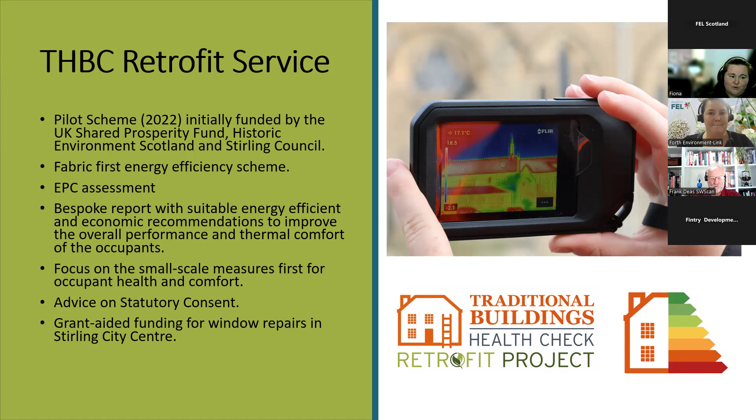The reason we did this was because we wanted to help traditional properties become ready for net zero, and also take a more realistic approach to net zero, because some of the things like external wall insulation aren't always suitable. So we would also provide advice on that and on statutory consents.

So back onto the topic, climate change is a serious global issue that is negatively affecting all of our properties. Higher temperatures and more intense solar radiation are leading to scorched masonry and uncomfortable temperatures for occupants. It's becoming more popular for properties in Scotland to install air conditioning in new builds, or retrofit cooling methods, to improve thermal comfort.

Our buildings are also exposed to more frequent and intense rainfall, resulting in saturated masonry and leaks within the property. In Scotland, we're well known for having smaller depths of gutters, whereas down south they have larger depths, and that's classed as a retrofit in traditional buildings if you were to do that. There's also wetter winters and increased wind speeds, resulting in damaged building fabric.

This damage can also create the perfect environment for vegetation to grow in unwanted places, or in hard-to-reach areas like gutters. All of these issues create serious problems for occupants' health and well-being due to the accelerated decay of their property. Properties exposed to water ingress and unplanned air infiltration are harder to heat, leading to higher energy use and energy bills. This is why it's important to realise that the first step to adapting your property to climate change is to keep the property dry.

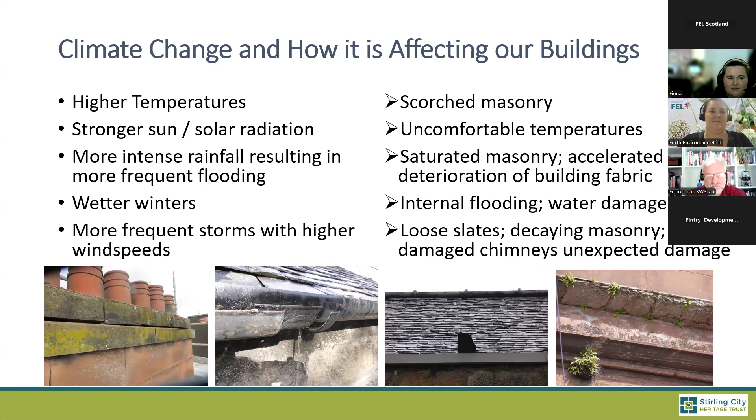First steps, fabric first approach. This is to treat the building to make sure that it is wind and water tight. Many or most owners do not realise that there is an issue until it physically presents itself internally, for example, if there's a leak in the ceiling.

It's important to encourage property owners to maintain and monitor their buildings. For example, if you have a slate roof or a tiled roof in general, some contractors offer an MOT, where they inspect the condition of the roof coverings and provide small repairs and other services such as bird proofing and ventilation. Other important areas are to always check any chimneys attached to the property or neighbouring chimneys to ensure that they are structurally sound and prevent unnecessary damage.

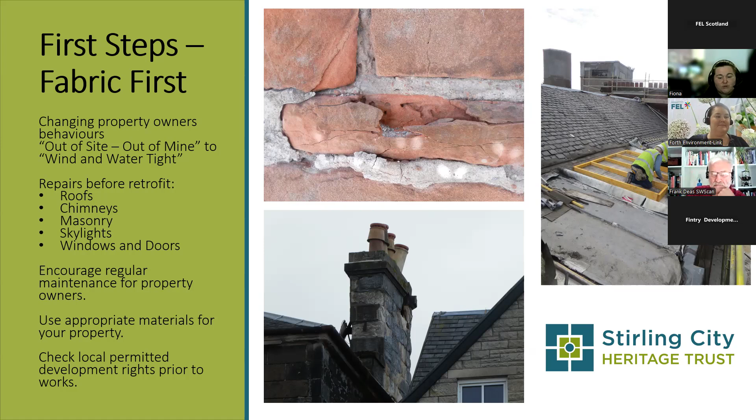If you're repairing a traditional property, for example, a sandstone property with a slate roof, you must ensure that appropriate materials are used. Avoid using cement products or expanding foams, as these are difficult to reverse and can be damaging to the historic fabric. It is also important to ensure that all areas are looked after and remain wind and water tight. So ensure you clean your gutters.

When maintaining and repairing your property, there may be an opportunity to also adapt the building fabric to withstand the changing climate. Here are a few examples.

Stirling City Centre had severe flash flooding last year, which led to excessive water running down from the castle, down the steep hills and directly into the shops, causing closures.

There's also an opportunity to install clay or tiled shop fronts to protect any timber or metal window frames.

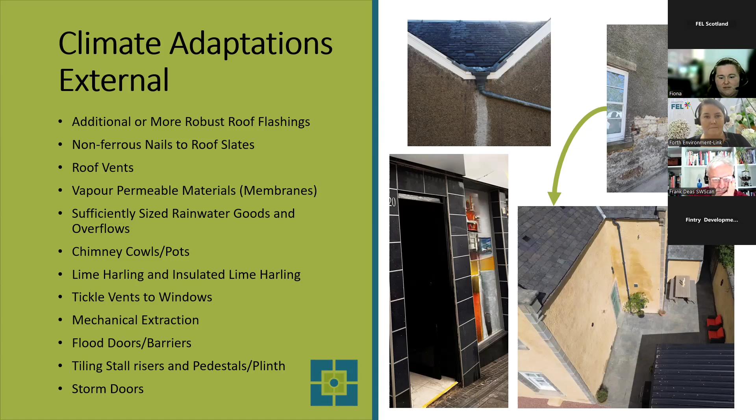This can also help waterproof and windproof the property. And if you have exposed brick walls or anything, as you can have in modern buildings, you can apply a rough cast, and this can prevent moisture deterioration to the building fabric.

I always encourage that you regularly, annually or biannually, get a chimney sweep to ensure that the condition of the flue is sufficient. Another alternative is to replace open fireplaces with an appropriate stove, such as biomass. This can reduce drafts and also provide a sustainable secondary heat source to a room.

Other fabrics can also apply to insulation. Now, you have your main area, which is your loft space, and most properties are usually fitted with some form of insulation, but sometimes it's maybe not as thick as the current recommendation, which is a minimum thickness of 270 millimetres.

When applying additional insulation, it's recommended to always apply on top of the existing insulation, as insulation can be a skin irritant.

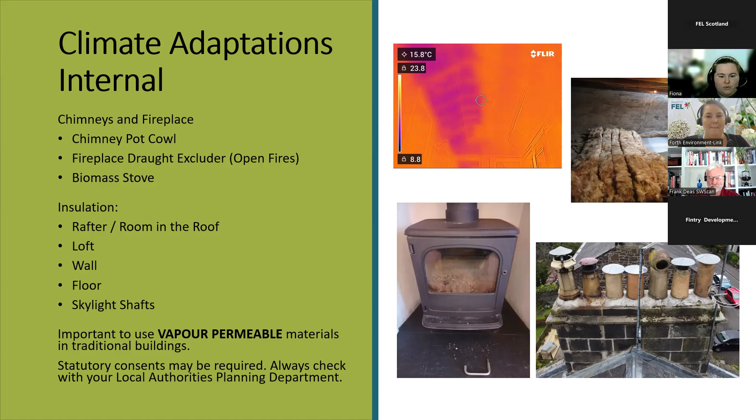Other options, other than draft exclusion, are secondary glazing, double glazing, or vacuum insulated glazing. Now, in traditional properties, many will have single glazed windows, so it's important to understand that this is a great part of the character of the building, but requires a lot of extra heating because a lot of heat is escaping through the window glass.

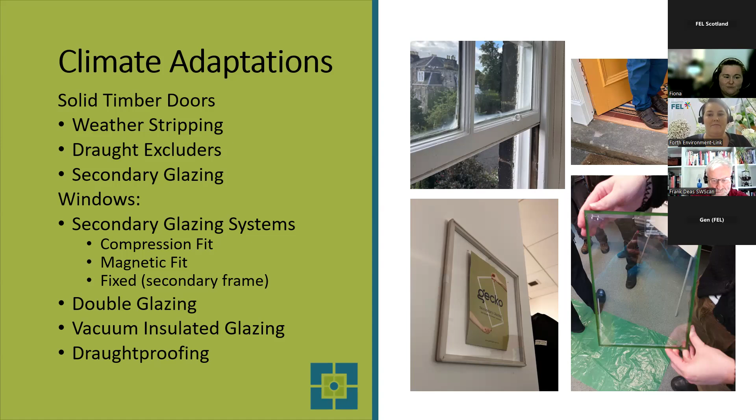I also recommend that your property at least has a thermostat, a programmer, and thermostatic radiator valves, also known as TRVs. If your heating system has a hot water cylinder, it's also recommended to have a thermostat. Being able to control when the heating is turned on or off can significantly reduce energy wastage.

Thermostats can control the temperature, and it is recommended to set the temperature to the lowest comfortable level for the occupants, which for most people is between 18 and 21 degrees Celsius. This can change depending on the room use, activities, occupant age, health, and other factors.

It is also recommended to set each TRV to the lowest setting that keeps the room comfortable to save energy. Always remember to ensure the frost setting is set in each room that is not used, if you're not turning your heating on in those rooms. It is not recommended to install a TRV in the same room as the thermostat or any covered radiators, as it can skew the set temperature of the thermostat.

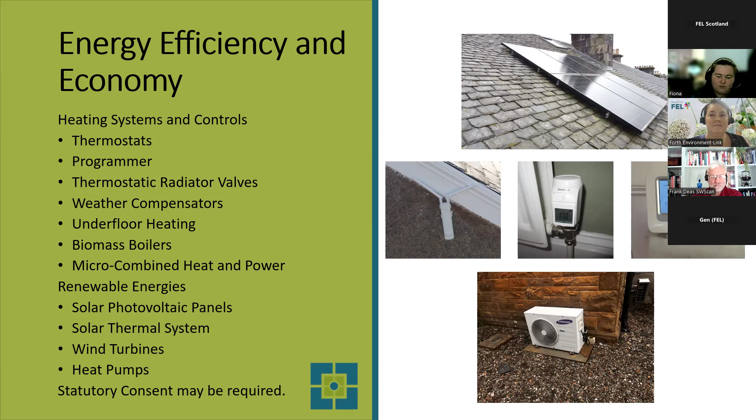When installing renewable energy systems, I would always recommend looking at your local authority's property development rights before installing. Please don't just take your contractor's advice, as they may not understand the local council's rights. If you are unclear, or you live in a listed building or a property within a conservation area, always send an email to the local council planning department for further advice.

Now on to a few case studies that we recently provided grant-aided works for. This project is still currently ongoing.

It's actually just finished in a way, but the property underwent a large renovation in the 80s and then in the early 2000s, where a cement render was applied to the sandstone masonry. Cement is a poor choice of material for traditional buildings, as it can trap moisture behind the roughcast and cause accelerated decay to the sandstone. The property was also suffering from internal damp on the gable wall, where the cement was starting to detach from the wall.

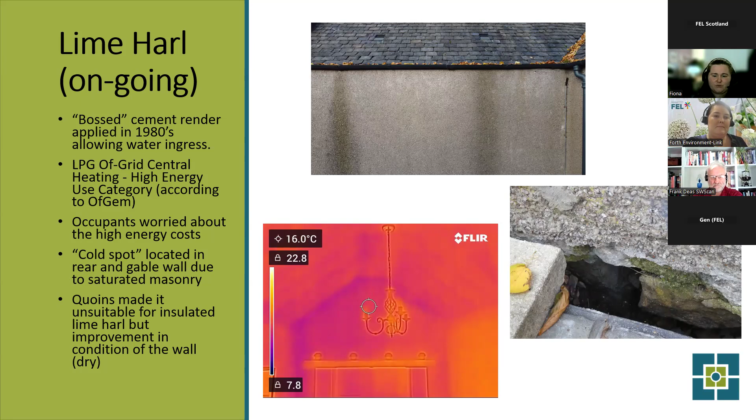So the property owners decided to use the health check to access a grant to apply for a lime harl. The property owners were in the high energy category according to Ofgem, and they were off grid, using an oil boiler, or LPG.

So they took the opportunity of the Traditional Buildings Health Check grant to provide 50% of the grant works up to a certain amount. This was a rare opportunity for Stirling, as most properties have exposed masonry.

During the initial planning, an insulated lime harl was considered, but due to the depth allowance of the quoins provided, it was not appropriate, as the character of the building would be changed. Therefore, a natural lime harl was used instead.

Once the property received listed building consent, works went underway, and it even provided a CPD learning opportunity for the Heritage Trust staff. This project has only recently been completed, so the data on heating has not been collected yet and is still ongoing. But the owners were delighted, and personally, I think it looks great without the cement.

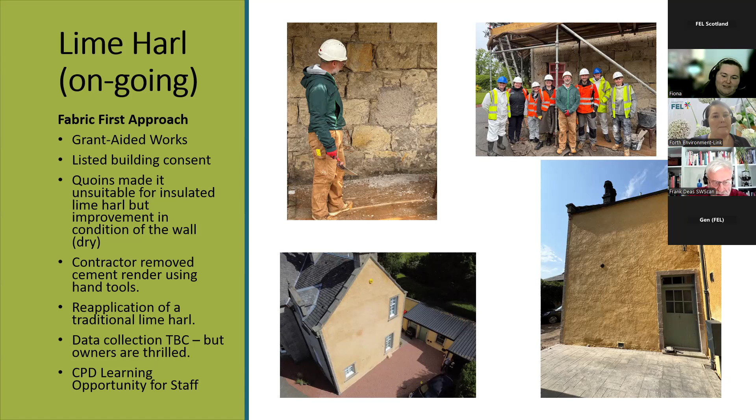Another project where we took a fabric-first approach was a roof and chimney repair. This property was suffering from moisture ingress due to slipped slates and damaged cappings and flashings.

The property was not listed or within a conservation area, therefore they could reinstate the chimney pot, which had been removed here. They also had an issue with the gutters, where the original cast iron had a few sections replaced with UPVC, and the joins were all leaking.

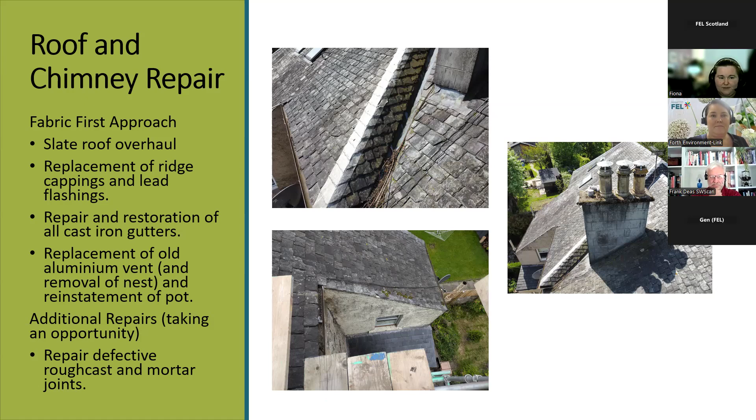So the Trust provided a grant to overhaul the slate roof and replace the ridge cappings and flashings, and the owner took the opportunity of the scaffold to restore the cast iron gutter, removing all the UPVC.

Due to a bird's nest on the chimney, it was vital that work started outside of nesting season. This allowed the contractor to reinstate the chimney pots. This is classed as Conservation Positive, as it had a positive impact on the character of the building.

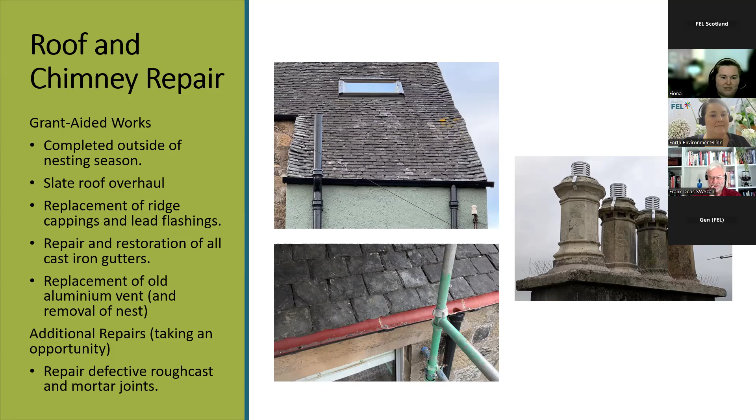Another case study is when the property is wind and water tight. You then have a great opportunity to install further energy-efficient measures. One of the largest areas of heat loss in traditional properties is through single-glazed windows.

One health check member was suffering from drafts in their home and constantly had the heating on. This made them a high energy user, as their boiler could not reach the thermostatic temperature. So the Trust provided grant-aided works to repair the original timber windows and take the opportunity to install draft proofing and secondary glazing.

This product is from a company in Edinburgh called Gecko Glazing, who have a patented design for a low-cost, compression-fit glazing system. It is fully reversible and does not require any fixtures into the timber, as it just sits in the pane. As you can see here, it's very difficult to notice unless you're up close.

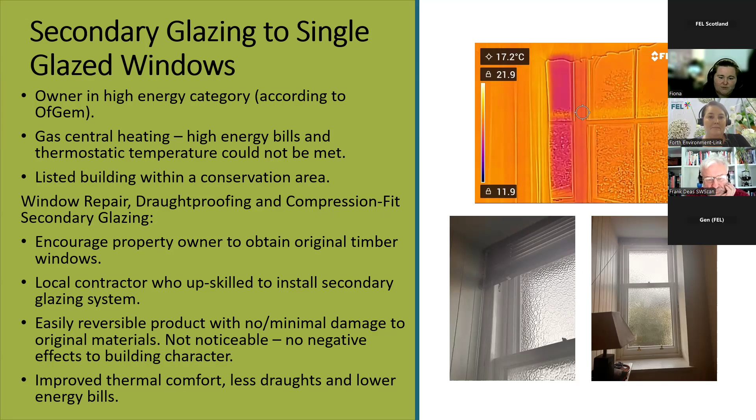The thermographic image on top shows the difference between the original window, where there's no secondary glazing fitted, and the window where secondary glazing is fitted. It's quite impressive, and the homeowners immediately noticed the reduction in drafts, and the thermostatic temperature of their boiler could be met, meaning very little energy was wasted, and naturally the energy bills went down as well.

Another energy efficient measure for windows is called vacuum insulated glazing. This is a type of glass that consists of two or more glass panes separated by a narrow vacuum gap. The gap is evacuated, creating a vacuum that minimises the heat transfer through the glass and acts as an insulator, improving the thermal performance of the building. It can equal or exceed the thermal efficiency of triple glazing with less weight and bulk.

This was fitted by the local contractor who took the opportunity to become accredited by the manufacturer. And with our funding, this was a great opportunity to create a green skilled job.

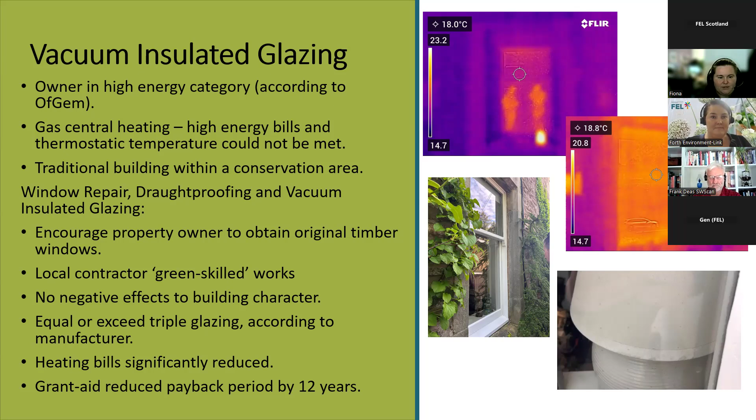And on to our final case study. This was our largest and definitely the scariest grant aided project. The homeowner had suffered a really uncomfortable winter, and the new boiler was just not generating enough heat to each room, and it was costing a fortune in their energy bills.

It was the one and only one so far where they decided to install underfloor insulation. The property had received an inspection by the Trust and it was found to be in great condition with no evidence of damp or water ingress.

The homeowners had moved in less than a year prior and were undertaking large renovation works anyway, so they wanted to take the opportunity of the floorboards being raised for the new heating system to install the insulation. The contractor was able to lift a small amount of floorboards throughout the property and install sheep wool insulation using the crawl space underneath.

This prevented excessive damage to the original floorboards, but it was still a large disruption for the household, so they moved out for one week.

It was a challenging project for both the owners and the trust, but once the flooring was reinstated and the data was collected, it showed immediate results. When the boiler is not on, the ambient temperature before the installation was sitting at approximately 14 degrees Celsius, but after the insulation was fitted, it was sitting at 17. So the 3 degree difference allowed the boiler to work efficiently and the energy bills to reduce significantly.

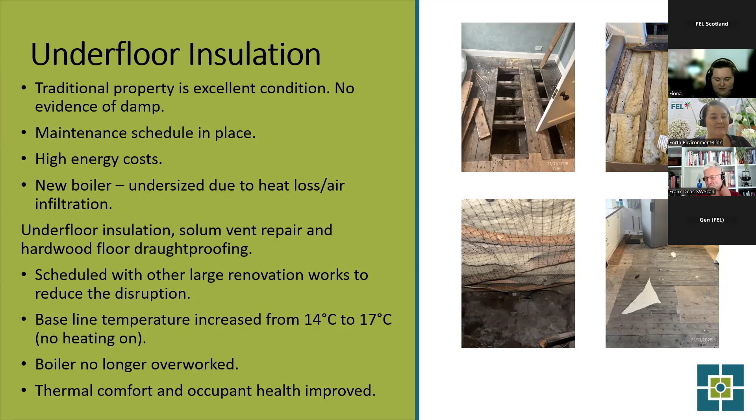That's perfect. Thanks so much, Fiona. Thank you for so much information there. Sorry, it's a lot of information. But it's a really helpful reference that we can go back to in the case studies, and a lot of rich variety in the things that you've done to buildings as well, and a lot of solutions, which feels very positive. Thank you so much.

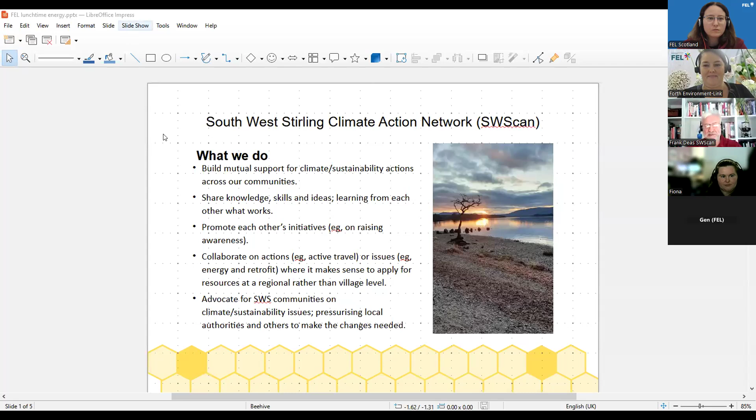So thanks very much, everyone. Great to have a chance to chat to you all today. Only vaguely nervous in recognizing that one of my fellow members, Kate, is also on the chat and probably knows more about this topic than I do. But Kate, I'm sure you won't ask any difficult questions, so we'll be okay.

Southwest Stirling Climate Action Network was comparatively recently formed, started this year, and really it's just recognizing that across the rural Southwest Stirling and the different villages of the catchment, lots of us are trying to work on climate or sustainability actions, but if we can share that knowledge, share ideas, promote each other's initiatives, collaborate on actions, we can achieve much, much more.

And in some cases, be an advocate for what has to happen, pressurizing local authorities and others to make the changes needed. So, hugely interesting talk, Fiona, really useful to see that the idea that listed buildings or conservation villages mean you can't do things is just one of those myths around this whole area. You can do things, it's just working out what you do and how you do it, and take that fabric first approach.

We've got a good relationship with the University of Stirling, with the postgrad team up there in social entrepreneurship. So they did a retrofit survey earlier this year, taking in communities in Strathblane, Killearn, Balfron, Kippen, Buchlyvie, Drymen, and Strathard, looking at attitudes, or awareness of, and attitudes towards retrofit.

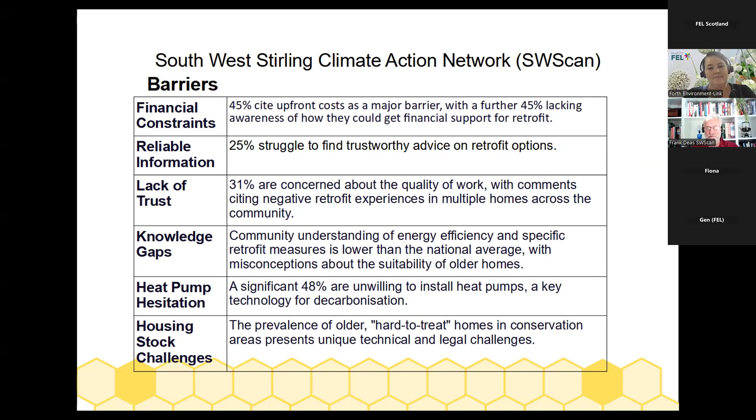One of the things that we're thinking about in terms of moving forward, and again, great if when we come to the conversation, if people have ideas or thoughts or questions, we'll try and answer them.

In places like South Glasgow, where you've got Local Home, or Aberdeen, where you've got NESCAN, increasingly communities are banding together to create what's called a retrofit hub. Those bring together surveying capacity and capability with contractors who've got the knowledge and confidence, and householders and owners who want to actually move forward. If you can bring all those together in a community interest company or a co-op or some other investment vehicle, you can work together to reduce fuel poverty, to achieve the environmental benefits of transition to low carbon heating and hot water, to help people living in those homes have healthier, happier lives.

I mean, at the end of the day, while I passionately believe we all want to have a transition to low carbon, that shouldn't be at the expense of people's health, and it shouldn't be at the expense of people's budgets. We should help that for them. Sharing that knowledge and expertise across communities, again, going back to the challenges we found, that people weren't sure what to do and weren't sure where to go for advice. It's not particular rocket science.

I'd ask all of you to think: when you need a plumber or an electrician, one of the things you're likely to do is go onto your village or community Facebook group and ask if anyone can recommend someone. People come back saying, I use so-and-so, and he's great. We need to develop that sort of capacity, ideally through our retrofit hub, in our communities, because then you get two wins. First, you've got a confidence factor for people commissioning work. Secondly, you've got a contractor who's really committed to doing a good job and keeping standards up, because they know if they get it wrong, an accurate reflection of their errors will be shared with all potential customers, and they won't get future business. So it's in their interest to get it right.